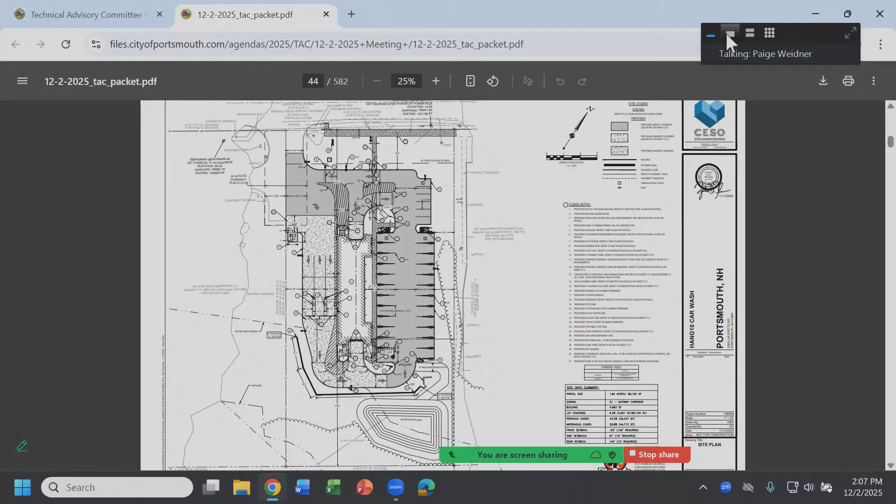As far as the layout of the site in proximity to the 100-foot wetland setback, between the set shown on screen now and a set I sent Peter this morning, we made minor updates where we shifted the site to the east to remove the building out of the 100-foot wetland setback, based on comments provided at the BOA meeting. That's probably more pertinent for the Conservation Commission, but I wanted to mention the change had been made. We're going in front of the Conservation Commission next week on the 10th. Are there any questions about the site before I get into the staff comments and how we're responding?

So if you're moving the building, is the whole site moved? The whole site has moved, yes. The layout and everything you see here remains unchanged. We're just going to provide more vegetated area on the left side than the right side, just to get the building out of that 100-foot wetland setback.

So the 100-foot wetland setback is in the back of the lot—yes, that dashed line right there. Did you guys look at all at moving it closer to Lafayette? I can discuss that as part of addressing the comments.

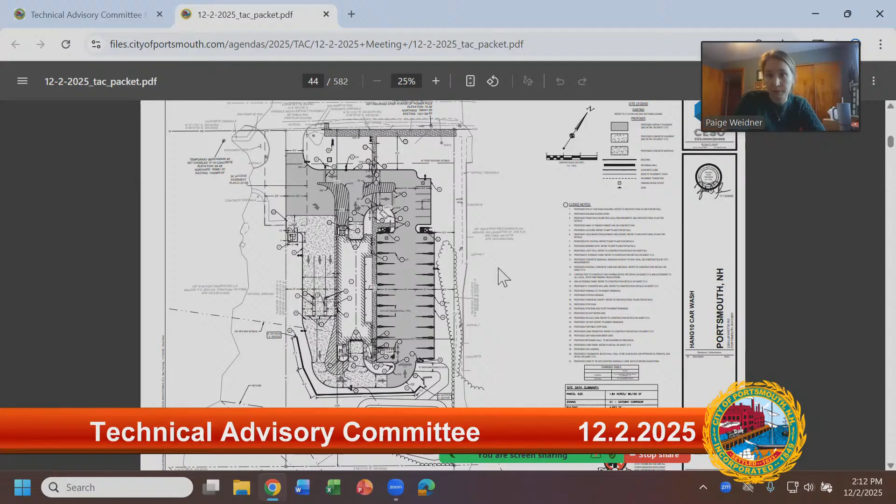Any other questions or comments before I move to the next staff comment? Okay, so the next one was asking the purpose of the 40-foot front setback line. That will be fixed based on the Gateway District and the results of the variance, so we'll remove that setback line. As to fixing the site data summary table to reflect the current required setbacks and noting the granted variances on the site plan, we will have no problem doing both of those items.

Comment number 5 was to provide a green building statement. We will be able to do that, but just to talk through it with this group, the car wash building, a typical building, does provide quite a few environmental benefits, or components, I should say.

One of those being the reclaimed tanks that Jason mentioned as he introduced the site, which cycle through all of the soapy water used in the car wash through three underground tanks, each 2,000 gallons. We reclaim about 60% of our water so we can reuse it multiple times before it won't suds anymore, and then it goes out into an oil and water separator and then into the sanitary sewer. This allows us to reclaim as much as possible by cleaning our filters, and obviously those tanks get pumped out periodically from larger sediment that builds up. So there are three 2,000-gallon tanks buried.

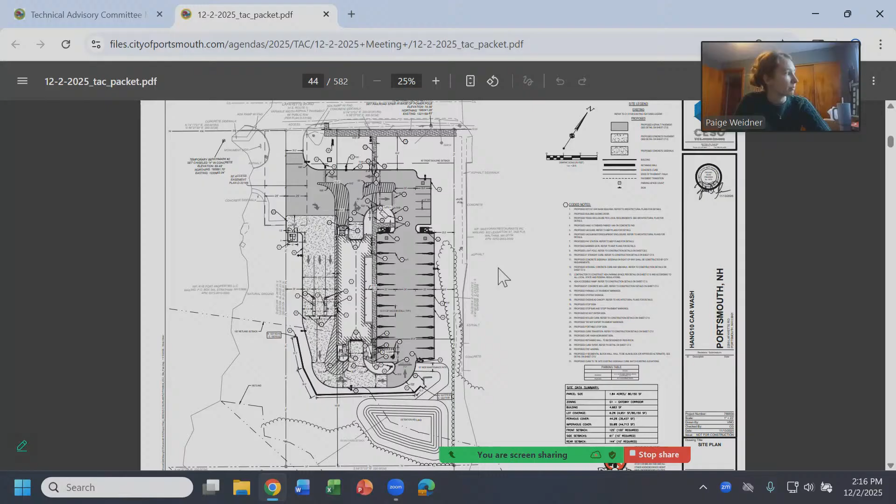Moving on to comment number 6 about the water service: it must enter the main building, then branch off for irrigation, since the city will not allow a separate structure for just a water meter and backflow preventer. So we will go ahead and relocate the water meter inside the building along with the backflow preventer. Do you want the irrigation meter in the building as well? Yes. Okay, perfect, we'll go ahead and make that change.

The next comment was that the trench drain at the entrance to the car wash cannot connect to the drainage system and stormwater detention pond, connect to the sewer, or function as an evaporation drain.

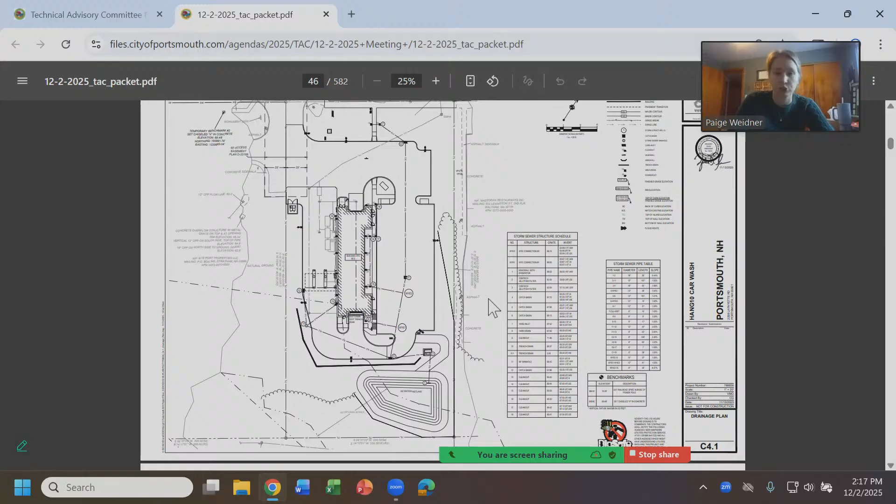I want to be clear that on the south side of the car wash, the trench drain shown is not taking on any soapy water from inside the building. It's only taking storm runoff that ramps down into the building, collecting the last bit of rainwater before it enters. It's purely a storm drain, not taking on any environmentally concerning elements that would be processed through the reclaim system and sent to the sanitary.

Is that something that still needs to be reevaluated, or can that go ahead and connect to the storm system?

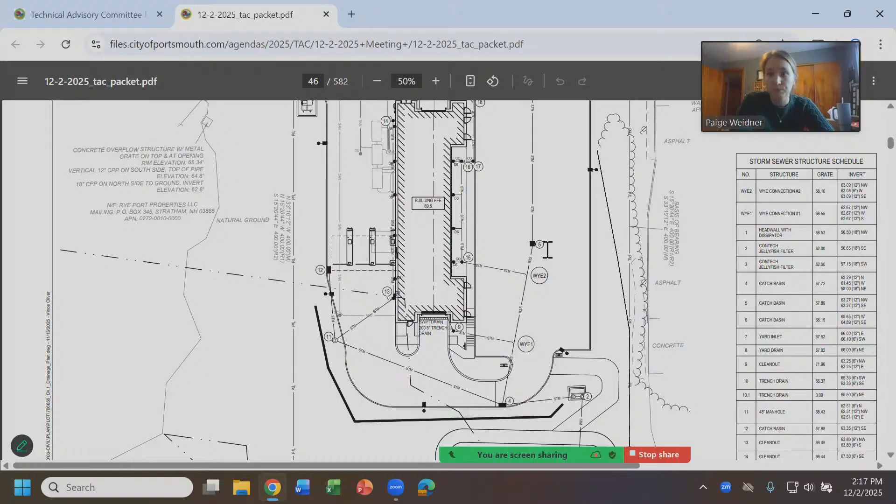The way we typically do our sites is we've got a slight slope for about 20 feet going into our tunnel. Mainly so people pulling in are looking down a little rather than up, helping guide their car in as we point them in the right direction. The other reason is with our belt system, as soon as their front tires get on that belt, they're put in neutral and the belt pulls them through, so that down slope at the entrance helps the car onto the belt easier. We have a similar down grade for about 20 feet exiting the building so the car rolls away from the car wash.

Obviously at the exit, all the rainwater rolls away from the car wash, but at the entrance, rainwater would roll down and come into the car wash, which would go into the system and into the sanitary sewer. So we typically add a drain across the front just to grab storm water so it's not rolling into the car wash.

Just to add on to what Paige said, the grade leading in was not very clear. There's a lot of grades missing on this plan. We can definitely go in and provide some more spot elevations to help clear that up. I think it's just 2%, right, Paige?

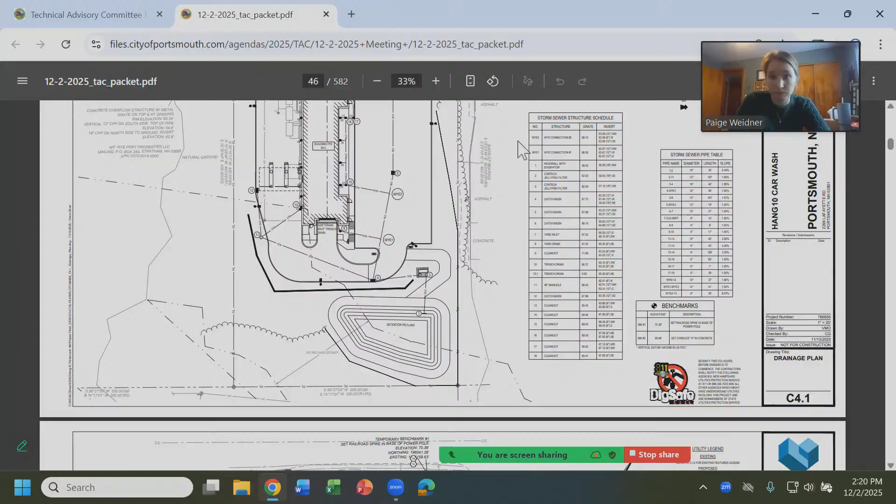Comments from TAC members at this time? I've got a couple, Peter. Go ahead, Eric.

I think you got some comments already from DOT on the curb cut permit application, the driveway. We do, yes. Okay, and just do those.

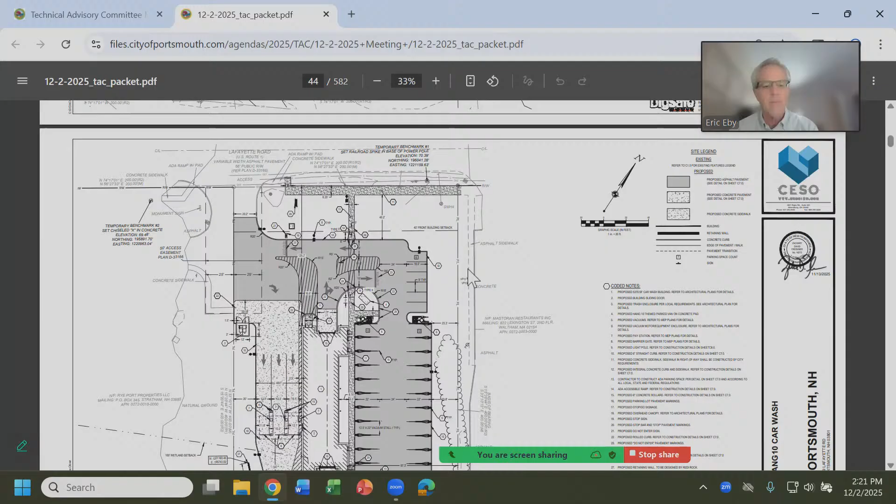The other one I had, up at the top there on the plan north where you have the striping to guide vehicles in and out, is that just striping or will there be any physical curbing or something to guide them? 'Cause I'm thinking it would be a free for all if you don't physically guide them. Yes, so there is a stop sign, a removable stop sign, coded note 24, in the kind of island of striping, if you can see. That is there to help direct traffic and slow people down to evaluate where they need to go.

But it's removable so that larger fire trucks, for instance, could move it out of the way easily to navigate the site. We have other sites where the striping and the low speed that customers exit the car wash at provides ample time to make a decision and follow the direction, so we haven't had issues at other sites. This has been enough.

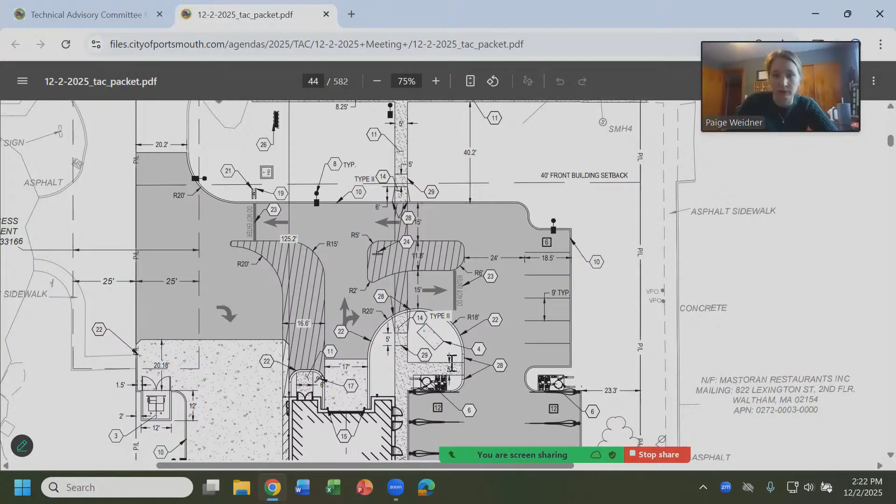I don't think they'll come up and follow the paint, especially if it gets worn off or covered over. I didn't know if there's some type of curbing you can use that you can put in there, but is that gonna be a problem? It would need to be a temporary or removable measure, just for the fire truck accessibility. But we could definitely work through with you what would be satisfactory. We haven't had a problem in the past.

In coded note 17, there is another sign. Yeah, it's a stop-go signage at 17 there. I'm not concerned about customers navigating with the signage and striping provided, but if that's something that's of the city's concern, we can definitely add.

I would say too, about 99% of our customers go into the vacuums. We want to give them the option for the very, very few that don't, but typically they're going to make a right and go into the vacuums.

Especially at night or something, it would just help to have something on the ground as a positive. You can do temporary curbing or reflector bits or something like that just to help guide them. I think it would be an improvement, something that wouldn't impede the fire trucks.

Yeah, we could look into that. Maybe breakaway little reflectors - is that what he was mentioning? Something that could break away, that could be run over, flex posts or something possibly. Something that would not be an impediment to emergency vehicles.

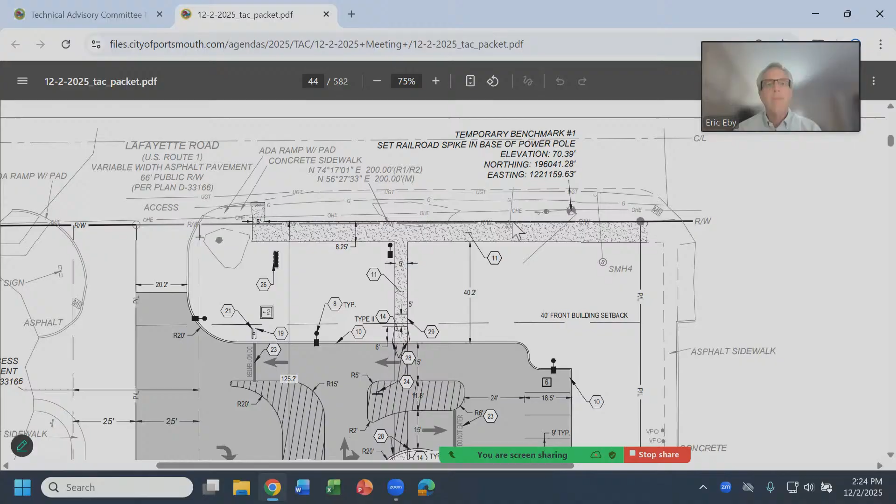I do want to note that the car wash is only open typically from 8 to 8. But it can get dark by then, especially in November.

What was the other one? Oh, the letters on the pavement where the 'do not enter' and stop markings are - I think they're shown in your specs as being 2 feet tall, but they really need to be at least 6 feet tall for drivers to be able to see and read them.

Same thing with the arrows shown on the plan - they look correct, but when you get into the details they're only 2 feet. We can make them 5 feet, larger. That's fine. So if they can be more MUTCD compliant, they would be a lot more visible to the drivers on site to see where to go. Yep, we'd be happy to make that change.

That's all I've got. How about the multi-use trail? Providing an easement - oh, that's what that is.

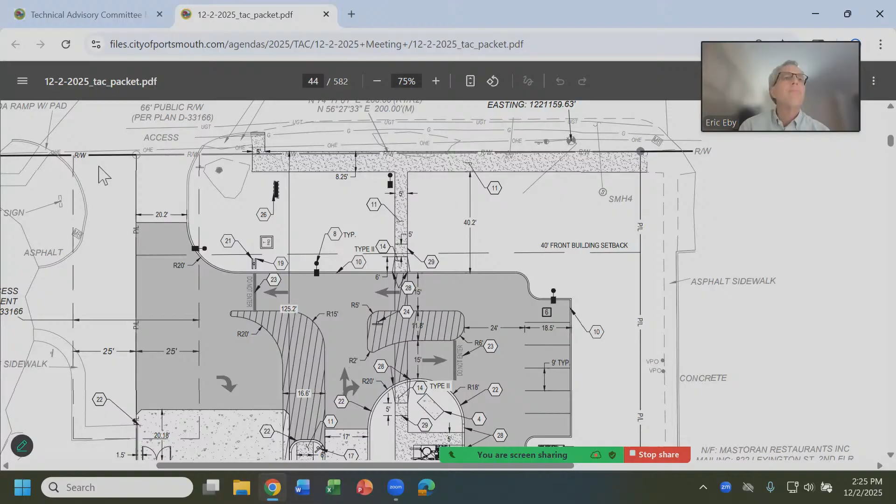What was it, 8 and 12? It would be expanded all the way to the driveway, and then the Taco Bell side needs to be expanded to the other side of the driveway - it needs to be continuous. It should be 10 feet wide if possible, because when it's shared with bikes and peds, 10 feet is the preferred width. That shouldn't be a problem.

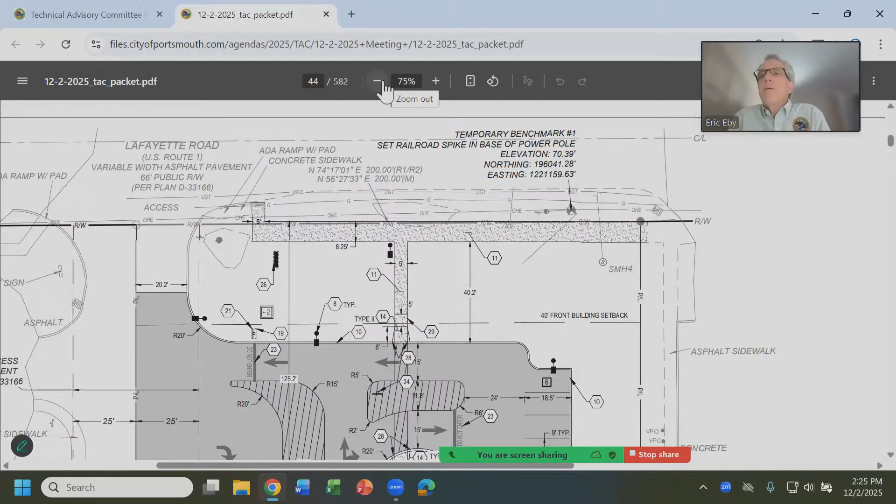Do we already have an easement out there? I don't know, Dave, is there an easement - the 12-foot easement that's usually provided by all these projects? I don't remember if we have one on this site or not. My instinct is we do, it was just never built, but now we're building it so we need to confirm that the easement's in place. So there is a 12-foot future road widening easement. Yep, that's the one. Okay, so nothing needs to be changed. I'll just show the easement on the proposed plans.

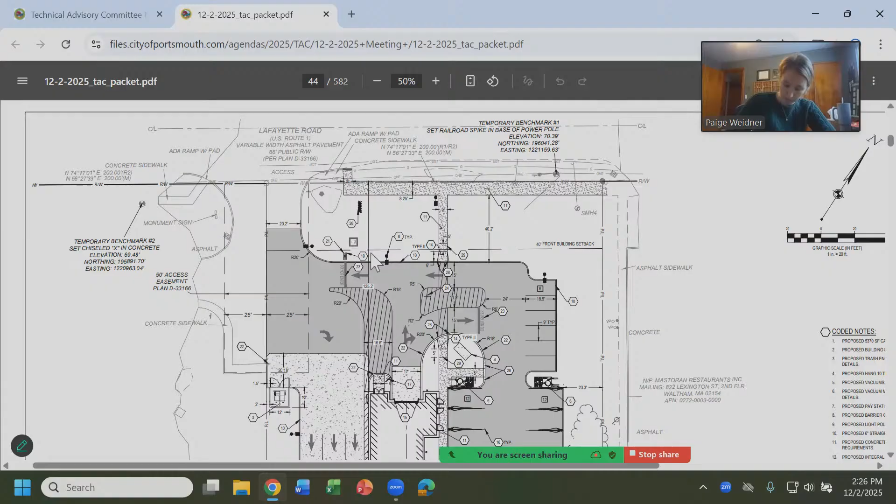The other thing I was thinking that's probably gonna be necessary on the site is a fence with a screen, so that with trash cans and stuff by the vacuums, we don't want that blowing into the wetland. We're gonna bring a fence around the whole vacuum area so that it contains the trash and doesn't allow it to blow - that's a very windy site.

If you can see the retaining wall on the south side of the site, would a fence along that be adequate? Can you point it out to me? His cursor is following it right now - yeah, just keep going up and up, all the way to Lafayette Road, just past the vacuums, so that the wind, which is usually coming up from the south, is blowing toward plan right.

Okay, for the multi-use path, if we provide a ramp to go into the driveway, are we going to be required to? Is it fine if we stop it at that point? As we've provided access, you need it from property line to property line. To cross the driveway, there needs to be ADA ramps on both sides. So that's the ADA ramp right now, on the Taco Bell side it's kind of diagonal.

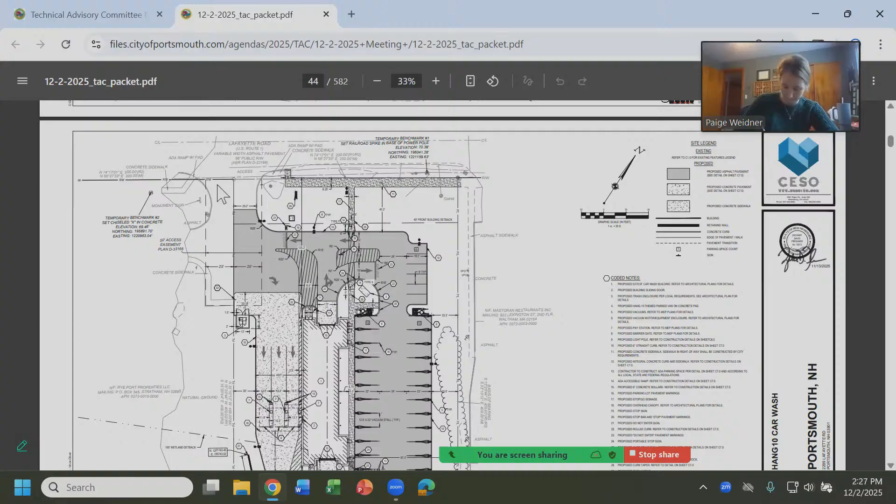It was diagonal because there was no walkway across the driveway to go to. So now, do we decide to keep going straight? Okay, so you want the ramp straightened out, yes. I just wanted to make sure I was understanding. Truncated domes on both sides, got it, with the stop bar in the correct spot, okay, the blocking. Yep, sure.

Just to clarify, because we're not leasing that property, that's in the state's right of way and in the easement controlled by the state of New Hampshire, it'll be allowed. We just need to get okay from the landlord and Taco Bell while we do work in their easement. You have to coordinate with them, but okay.

Pat, go ahead. So the truck turning template is a concern. Right now you have us doing a 3-point turn. Sorry, what are you looking for? The truck turning template exhibit, right now we're doing a 3-point turn to get out, and we're smashing through a few parked cars there.

Okay, we can, ideally we would go around the building. And so the furthest gate from the building would have a Knox key switch. Okay, so the problem we have with that is our lanes are typically 9.5, and we have a truss system with a 7'2" stop height. That's the highest car that could go into our wash. We don't want to go inside the building.

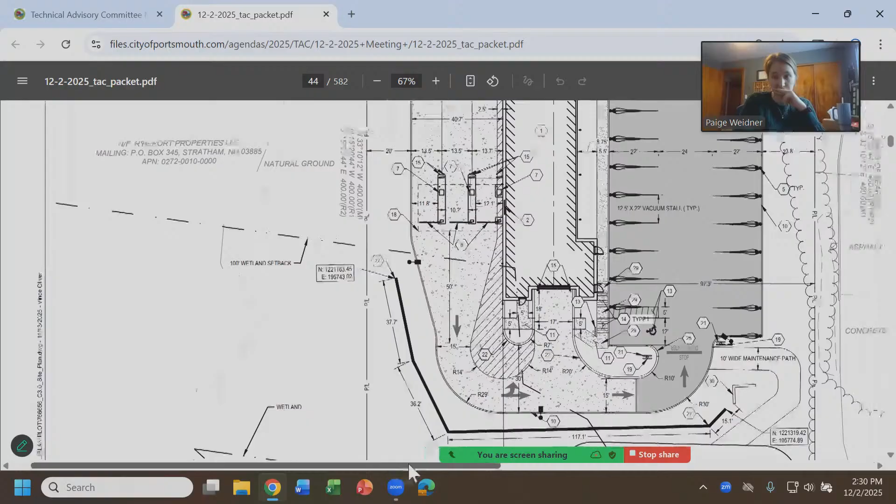I mean, they'd have to back out if they hit it, but at least that would allow for fire truck access. Well, they've already paid at that point, though. They'd have to get a refund. Yeah, wow. I mean, that's something you guys can work out, how you deal with that, but we just need to be able to get around the building. There's not enough room to do a turnaround.

Where you're showing, 11-8 will be tight, but we can get through that. And you can just do that outside lane, the Knox key switch, and then if there's a height test type of thing, a barrier, it would have to be at 9. I don't know where we would put the height. I mean, I can't put it past the gates either.

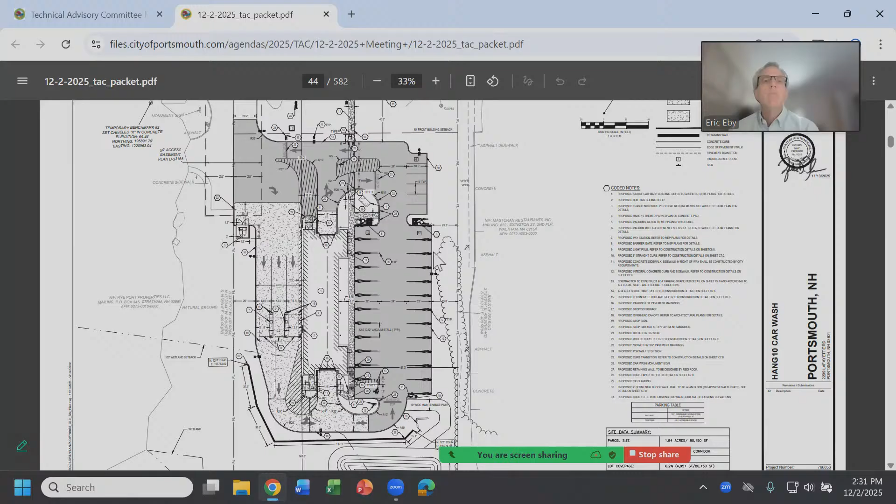Because you would still be driving through it. Right? If the height thing is there so you don't hit the building when you go in, then as long as you have it before they go in the building, it would accomplish that, right? You mean like right before they enter the building? It would have to be like where the 22 or the 11 is, somewhere in here it looks like. Yeah, to the front of them, right?

Unless you can come up with another way to get us access around the building. How tall is your truck?

Is your intention to bring this to the Conservation Commission first, to see if there's going to be modifications before we approve it? They're going to the Conservation Commission next week. They're heavily in the buffer zone, so I suspect they're going to have issues, they're going to ask for modifications. So I'd rather take a last look at this after. I would think it'd make sense to do that.

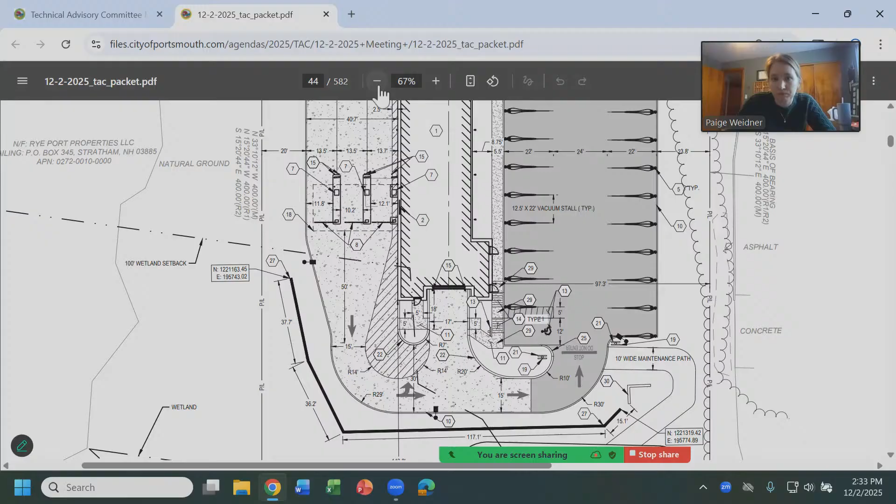Would we be able to get a conditional approval, with the condition that the site did not change based on next week's results? And if next week's results are drastic enough to make significant site changes, then we come back? Is that a possibility? I suspect you're gonna be coming back anyway to address the fire department's concerns, the stormwater, and the grades.

And the water meter. I'm also trying to think about our LPR cameras and how high those are mounted in that pay lane for our members. I think the maximum height they can be mounted is 9 feet. Yeah, we need to get around the building, so however you put out to do it. Jason, we could explore potentially a bypass lane, see if we can't squeeze something in there, but I'm not quite sure how that will work with the pay lanes.

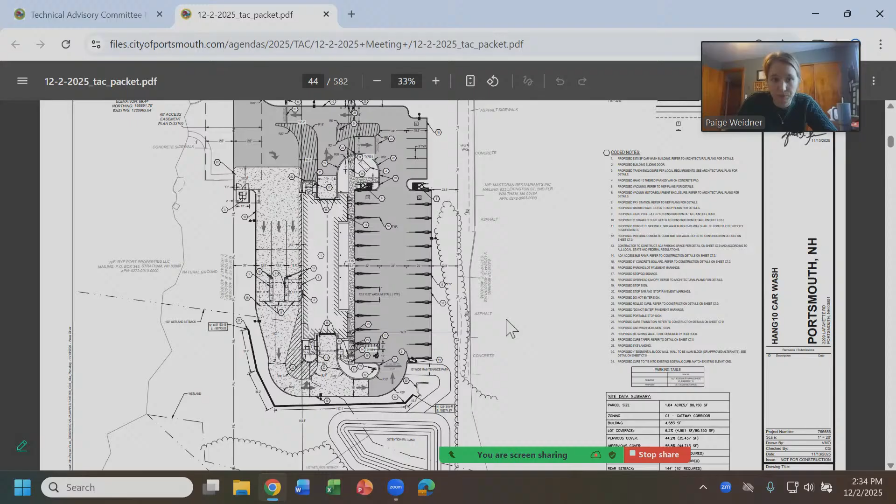I know it's not for this, but did you see the comment that Kate sent about the New Hampshire wetland scientist? I did, and I've been working with Kate directly on getting her that information. Okay, great, thank you for bringing it up though. Yep, just wanted to make sure you're aware. Yep.

All right, is there anyone here from the public like to comment on this? Or anyone on Zoom? All right, if not, we'll close the public comment portion and open up for further discussion, if there is any.

I'll just clarify a little bit on fire department access, just to save having to come back multiple times. We don't do removable bollards or anything that we have to get out and move. We're okay with mountable curbs, that sort of thing. You are, okay.

I would also add the landscape plan looks good, but there's nothing shown other than lawn for the pond. Is that your intention, or usually we'd be able to landscape that a little bit? We can provide additional landscaping around the pond. Around it, it looks like you just have lawn and nothing on the banks. I guess, is it gonna be lawn the entire thing? If that's the case- Yes, that was our intention. Just be clear that that goes the whole way. Okay, it appears like it's just the top strip. Okay, and then you have a maintenance schedule for mowing it or however you're gonna maintain that. Sure, sure.

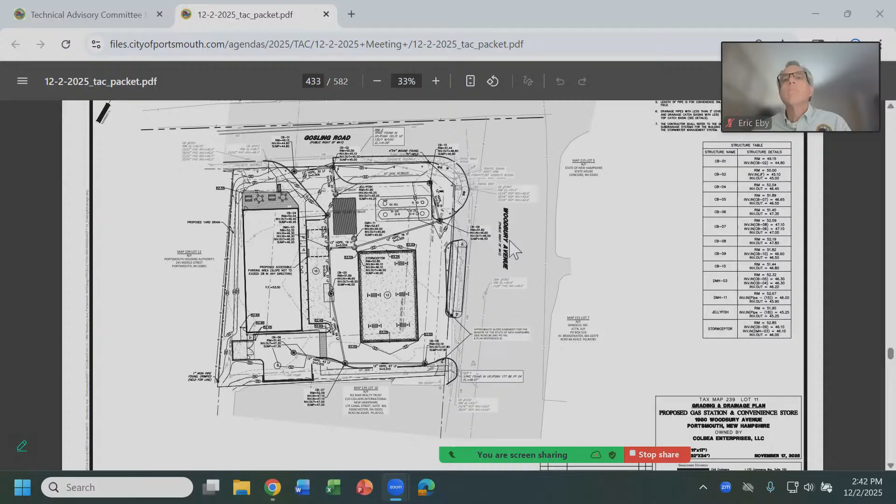Nice. Can you adjust your existing features plan and move your note? I didn't see a note to abandon the existing sewer lateral. Maybe it's on the site prep plan, not the existing conditions plan. Do you want something specifically noted on existing conditions? Hold on, I'm getting there.

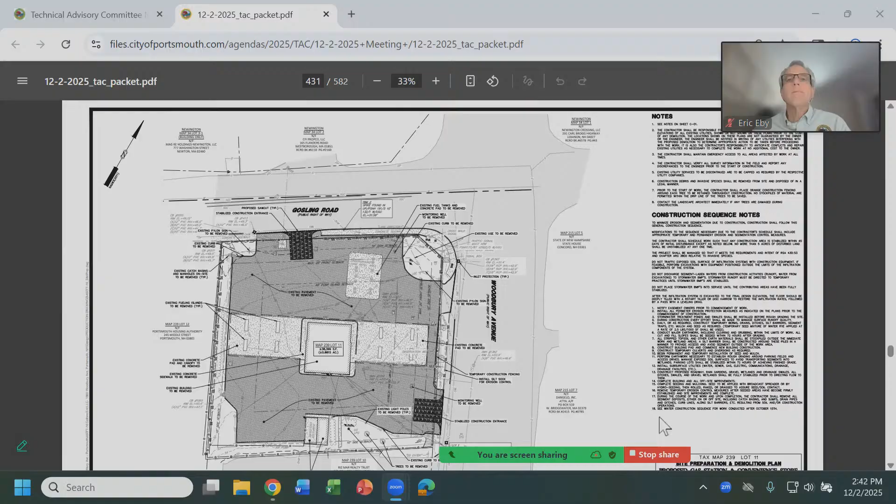And then some of the notes that you had regarding that water service are no longer in the right spot because the water service has now been moved. Okay, so we have to take a look at your plan and just update it so it's correct, please.

If that hydrant's gone, then remove it off the plan as well. Where did the hydrant just get moved to? I'm not sure, I just got the comment yesterday afternoon, so we'll take a look. I think it's there, but I haven't, I'm sure it's there somewhere. Maybe it got shifted further south.

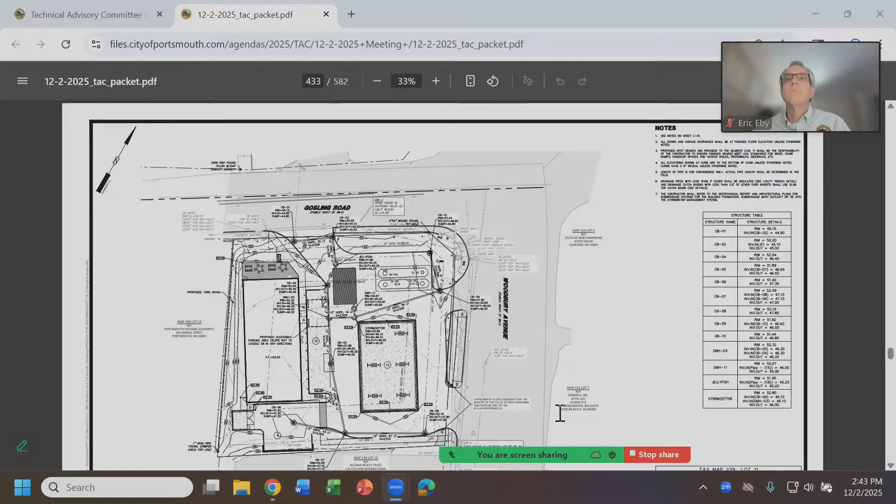We actually have, yeah, the hydrant over by... Peter, I'm not sure if the comment came from you or from Stephanie, if we should coordinate that. If it is in fact still there, we're obviously not going to remove it from the plan. I think it's, I'm pretty sure it's still there.

You're showing the 8-foot sidewalks all the way around the site? That was one question we wanted to discuss. Right now, the existing sidewalk on the east side of the plan along Woodbury has 8-foot sidewalks up until the northeast corner, and then it's 5 feet from there, wrapping all the way around.

8 feet can be provided there. It's all in the city right of way, but there are a lot of control boxes and signal equipment boxes in that location, so I don't know how you wanted to address that.

We could provide an easement to allow an 8-foot sidewalk for the portions along Gosling Road at the north end of the page. But would you ever go from 5 to 8 back to 5, or keep it at 5? We would do 8 and wrap the sidewalks around the appropriate spots.

As long as you're not in the mast arm, which it looks like you might literally go around. The traffic signal box you would go around, and the rest of the boxes are flush with the ground, so it shouldn't be an issue.

And like I mentioned, if you zoom in on the corner, that makes the accessible route easier because you're now incorporating the push buttons into the sidewalk. That's fine, I just wanted to ask the question for clarification, so we'll show 8 feet?

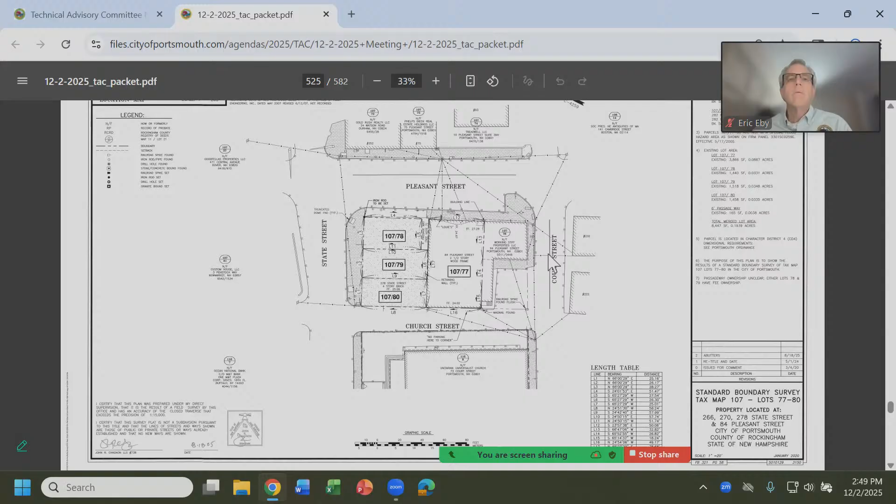I don't know how much more you want me to present at this juncture, but you have a license plan shown there in your package. There's some cornices that were requested in the HDC process. They're up in the air above the sidewalk by a few stories, but they'll be in the city space, so there'll be a licensing process gone through with the council for that improvement in the city's right-of-way.

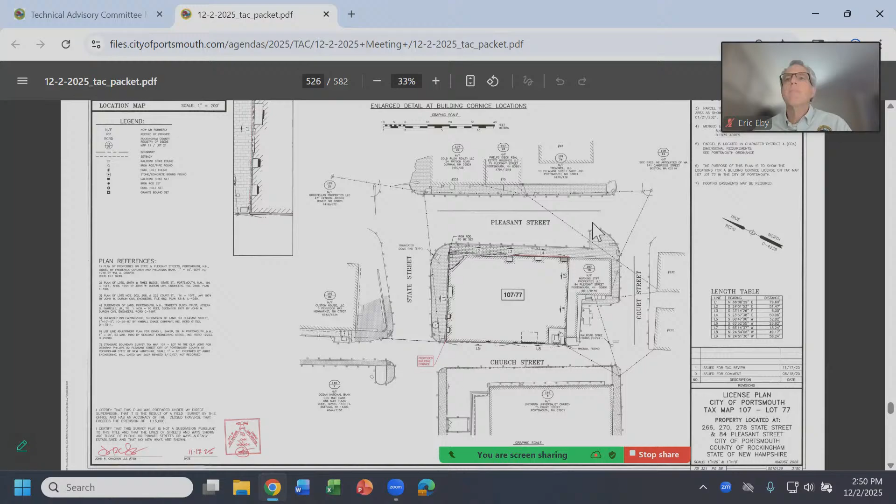The next sheet is a recent orthophoto plan showing the site as it exists with the outline of the proposed building in green. There's an existing conditions plan, a demolition plan showing the removal of a portion of that building at 84 Pleasant, and then the site plan. The site plan shows the new building.

The proposal is to have access to parking at first floor level. The parking is accessed from Church Street through a garage door. There's, in your package, some turning movements that have been submitted. There's a parking system that will allow the 2 spaces shown here to contain 8 vehicles each - 8 on the left, 8 on the right, plus 1 surface ADA spot, yielding 17 parking spaces for the site development. The project has 17 units, so there'll be 1 space per unit.

Based on the changes to parking requirements, 1 space per dwelling unit is the maximum with the 4-space DOD reduction. 13 spaces are required, 17 are provided, so we meet the ordinance requirements there.

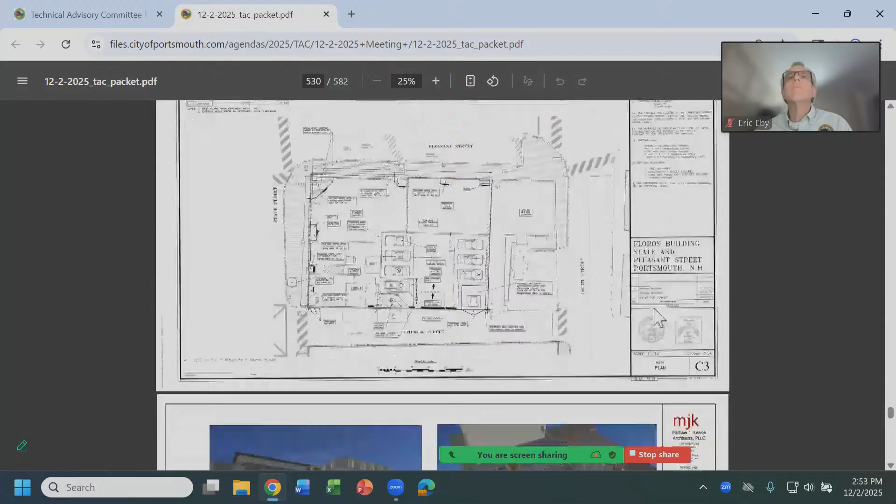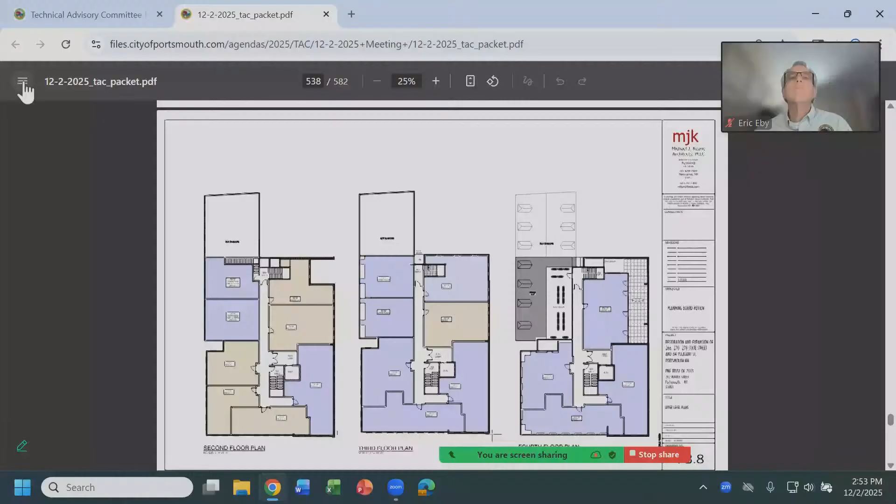We have building renderings in the set, floor plans, and a utility plan showing the proposed connections. We also have off-site electrical plans and a lighting plan. The roof drainage will be connected to city infrastructure, which is shown on the roof drainage plan, and then we have the requisite detail pages. We received comments yesterday, and we've provided a response today.

If there are no other questions in general, I'll go through those and provide our responses. Sounds good. Okay, so the first comment is on Church Street.

The doors for the transformer cannot open across city property, so the site plan shows a swinging gate, and you should be licensed for that. We would add that to the licenses you're already going for. Okay, so it's okay to have the swing gate, and we just need a license. Yeah.

The second comment is to provide an easement plan showing the easement. They can get it, yeah. If there's another way to do it without having to get a license, it'd be preferred, but this is part of a negotiated thing that the Public Works Department worked on with Eversource ad nauseum, really - it's part of the electrical backbone for this part of the city. Understood - the department's going to support it, but the department doesn't give the license, that's city council. Right, exactly, that's the only point I'm making.

In the response, we did say we're showing a gate, and we understand it would probably want to be shielded, both for looks, for HDC, and also to keep people out of there. So the architect will be working on some various options. Maybe it can be something that doesn't swing, but either way, we'll take care of that. Okay.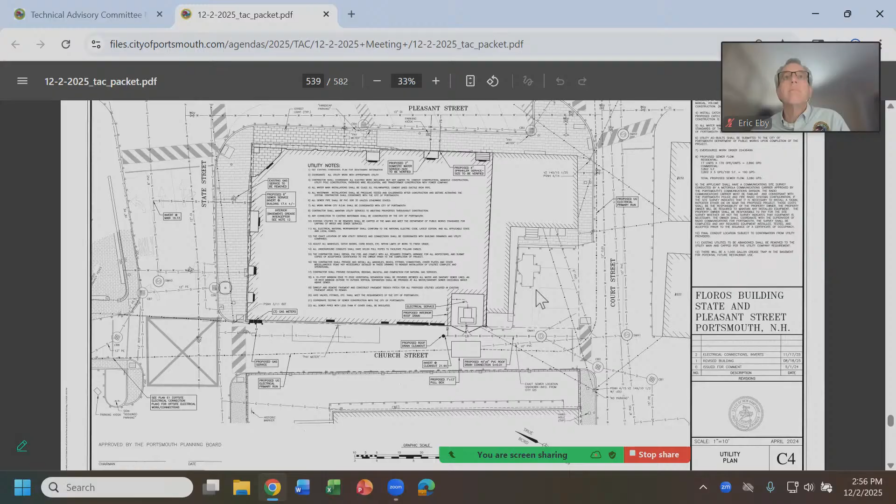There is a sewer shown on your GIS, but it's just a stub that we put in when we were doing Court Street. We're not quite sure where the Stone Church's sewer lateral comes out of the building. We need to chase that down to find out, so that we make sure we don't do something foolish there.

And we'll add to that note, we did put a note on there about the easement.

If a restaurant is proposed, please show grease trap location on the plans. There is a grease trap shown interior, a basement grease trap. How do you plan to get that pumped out, is there a hatch or something? Most likely there would be a portal you could stick the hose in, like at Jimmy's Jazz Club. There's a couple of other locations like that too.

It was 1,000 gallons, so that's a good size.

Comment 4 is to include notes on the utilities plan to cut and cap existing water and sewer services. We added note 14 on utility plan C4. Next, delete note 9 on the utility plan, so we provided a strike-through for that.

Cut in a Y for the sewer connection, and include a clean out in the sidewalk for testing. That's on the State Street side, so we showed those items. Hopefully that's appropriate, how we laid that out for you.

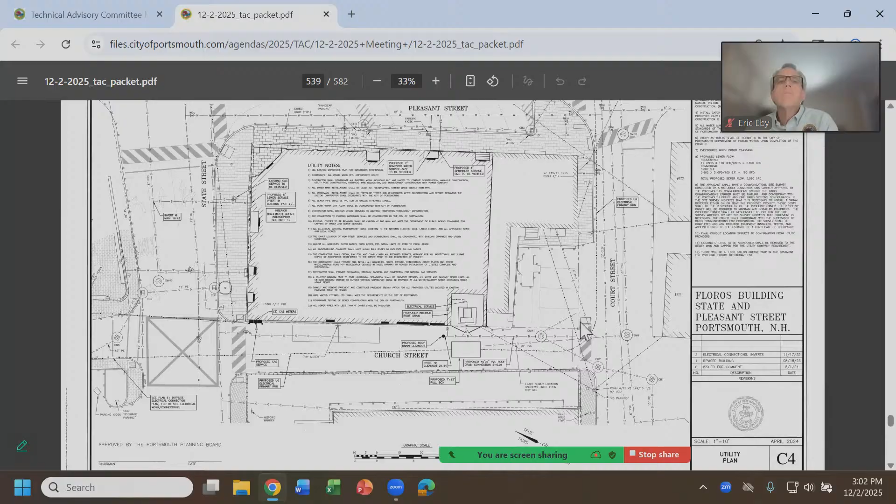The rest of it looks okay, John. Are you using 6-inch granite curb or replacing the existing? Typically we have a construction note above it that says existing granite curb disturbed by construction shall be reused. Are you adding any light poles, or resetting the ones that are there that will have to come down?

Nothing citywide — we're not touching any kiosk locations, striping, or poles. We are adding site lighting that will have some spill, which I think is a benefit. Why don't we just add a note saying that if any street lighting needs to be moved for construction, it gets replaced or reconstructed by the contractor as appropriate, because you're going to need SOE here, and that's going to wipe out the sidewalk.

So the street lighting shall be preserved during construction, or replaced and reconstructed as needed, and approved by the Public Works Department. And all your grades on the sidewalk are showing less than 1/4 inch per foot? Yes, I went with 1%, so I took the — I might have gone 1.5, but I didn't go more than 1.5, that's for sure. Okay, good.

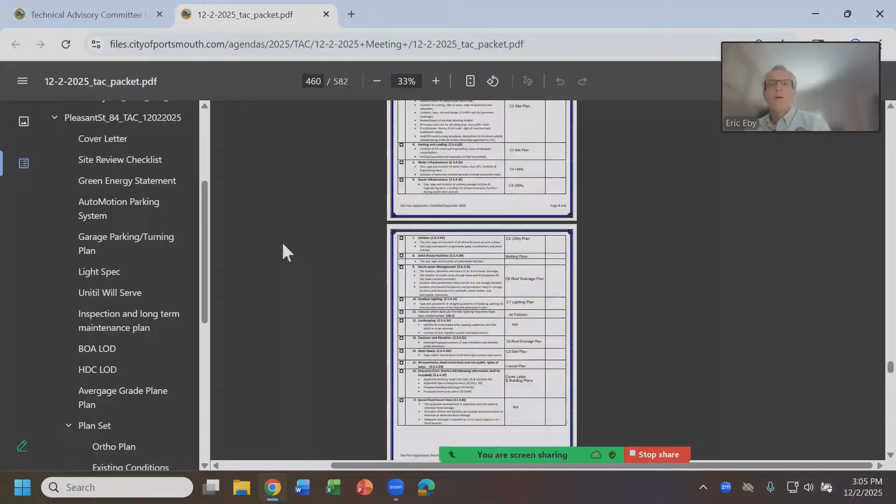Eric, do you have any comments? My comments are mostly on the parking, on how the automatic parking works. The driver drives the car into the empty stall, and there's room to get out and maneuver, walk alongside there? Correct, yes. It just looks really tight. Looks like as long as there aren't any cars over 17 feet long, it'll work. But I'm wondering about when the driver has to drive into the empty stall, then get out of the car, open the door, and get out.

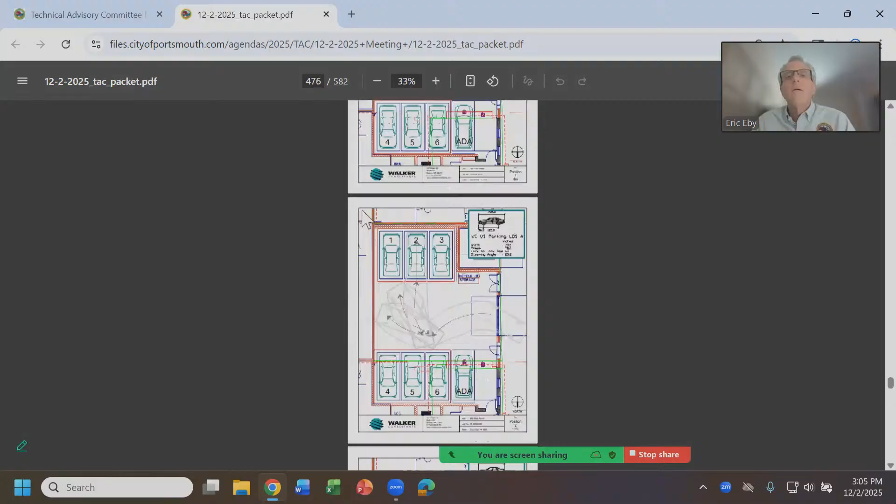If you go to the other view — keep going — it shows the system. It's kind of like a parking spot: there's a stripe, and there's a little extra space because the car isn't right tight to the stripe. It doesn't have a fence barrier, so it's just like parking in a parking lot in a way, as long as the door can clear. Is there a little curb on the side? Yes, the door will swing over that beam that's part of the pallet. We're actually looking at a system with an even lower pallet beam, but haven't selected a final manufacturer yet — all of them allow the door to swing over into the adjacent space.

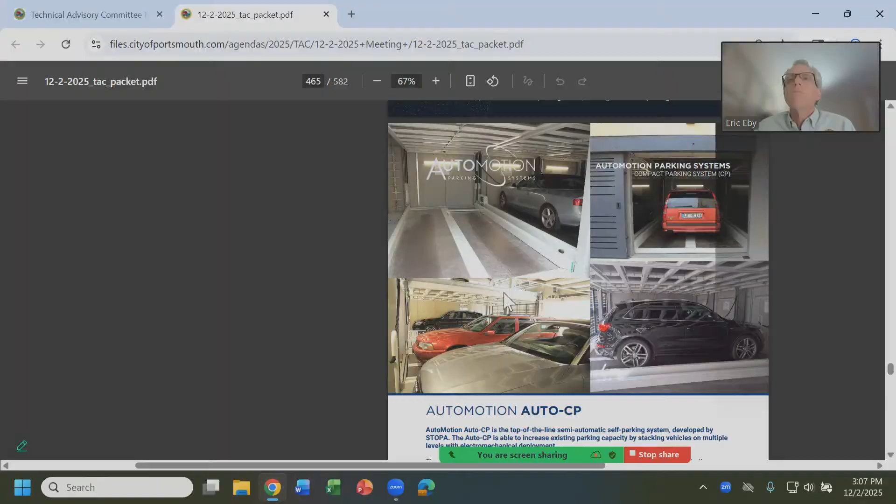And there's no way a person can fall in between the two stalls or anything? Correct. Can they pull into any of those, or do they get assigned? So it's not like one of the systems described where you always pull into the same space and it just moves — like the middle one is always empty. Right, but that's not this, right?

You'd pull into any one of the three that are at grade level, and then the cars would shuffle around. The pallets are assigned, so your pallet comes down to whatever empty spot is at the drive-in grade, and then you drive in — but that may end up at any one of those three positions at grade level. We had originally hoped that each could move up and down.

Does each spot hold 2 cars or 3 cars? Three — except there's one spot that's always open. So in a 9-pallet array, there are 8 parking spaces, because there's one spot that's always open that allows you to shuffle. So the cars can move side to side as well as up and down.

No, originally we had hoped perhaps that we could always make the center stall the one that you drove into, just because it made the turning movements easier. But the manufacturers are saying we need to make all 3 of those at-grade spaces available for the car to come in order to be able to shuffle them around. Otherwise, we'd need 2 open spaces.

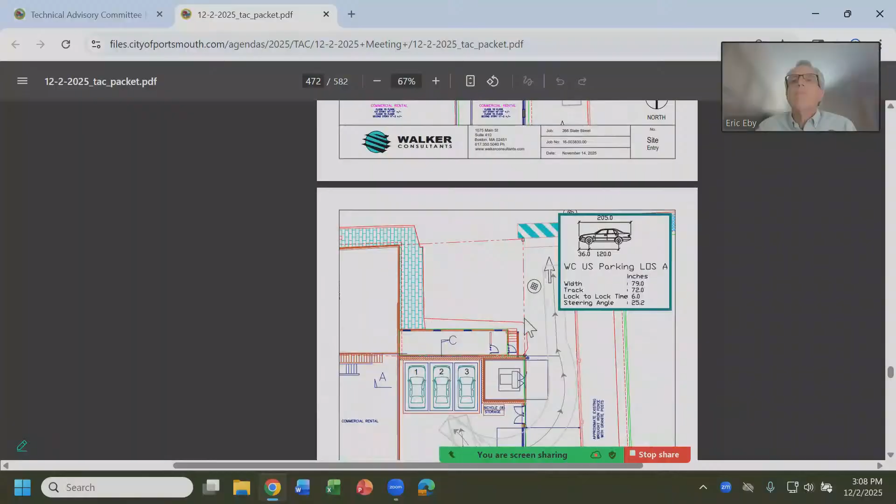Do you think these turning templates in there are realistic? The consultant said that she used LOS A templates, which are most conservative to allow for some margin of error. Her explanation was that that would be adequate for somebody who's not familiar with the space, and as you get more familiar with the space, they would typically start to tighten those down, but to be conservative, she used the LOS A turning templates.

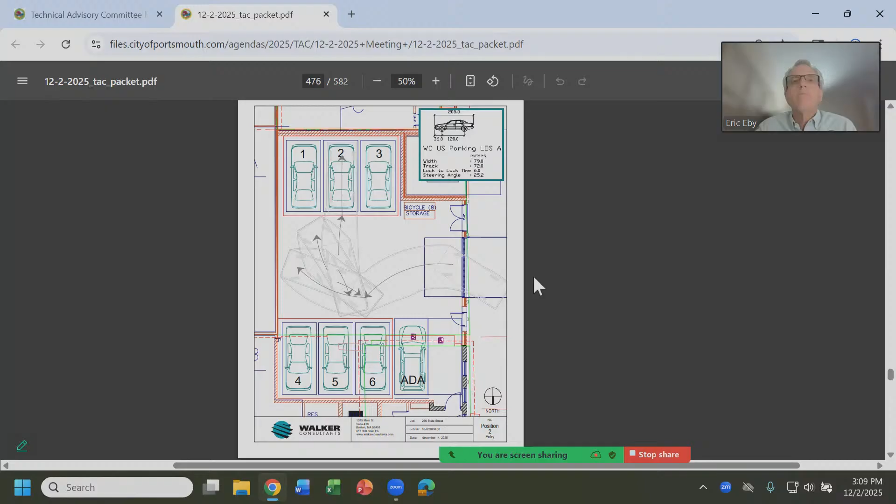There's some looks like 4-point turns in there. There are some, yep. And the 2 spaces that are closest to the interior wall with the Louis building did not work well for what they call their design, the AASHTO passenger design vehicle. So they looked at them both with the AASHTO vehicle and what Walker Consultants uses, their 85th percentile vehicle, which would represent 85% of the cars that are on the road in America today. She said the 85th percentile car worked well, but the AASHTO P vehicle was a little bit tight trying to get into those 2 spaces.

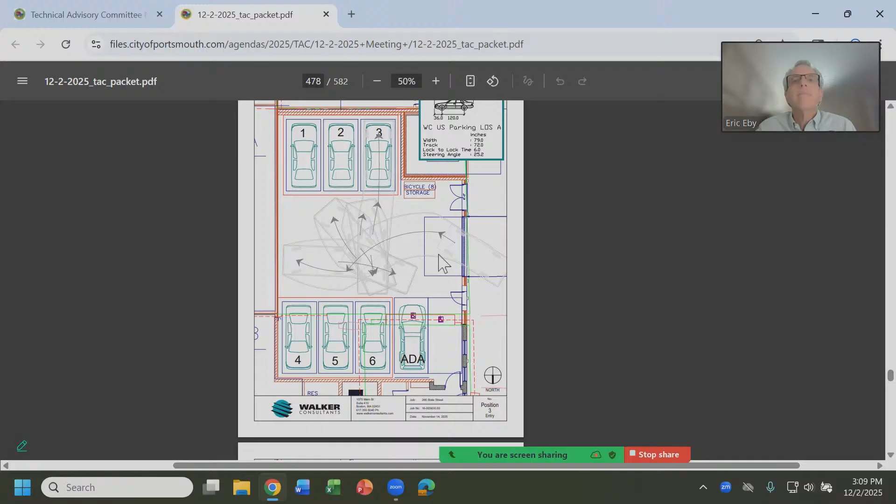Matter of fact, they had done a study that said you could back into those spaces fine, but obviously that doesn't work with the city ordinance that you can't back in off of Church Street. So we're showing those - what would be 6 spaces - would be for an 85th percentile vehicle. It seems unlikely to me that people won't be backing out onto Church Street as opposed to doing the 4-point turn.

And the guest parking is part of this too? The calculation is such that the DOD has a 4-space reduction - 4 guest spaces are required, so I think the guests will be parking in the spaces that are available in the street network, essentially. That's what that means.

You need to have a key fob or something to operate this, right? There's actually, I believe, a control pad that you'd use, a computer interface pad. We had talked about the possibility of being able to do it with your phone or a key fob or something like that, and the explanation is you probably don't want to do that because you don't want that system moving if there's not somebody in there to have their eyes on the system to make sure everybody's safe. So the recommendation is that at least as you're retrieving your car, there would be a computer interface monitor.

Are there safeties built in so that if there's somebody in the actual parking space it can't move? I've seen some videos where some companies have that detection system - I'll confirm that. Similar to a garage door or whatever, something that would detect that there's something underneath it and not move. Yeah, more of the whole area, make sure that - you want to make sure someone's gotten out of their car, out of the space, before the next person tries to maneuver things around. Otherwise, that person gets caught up inside there.

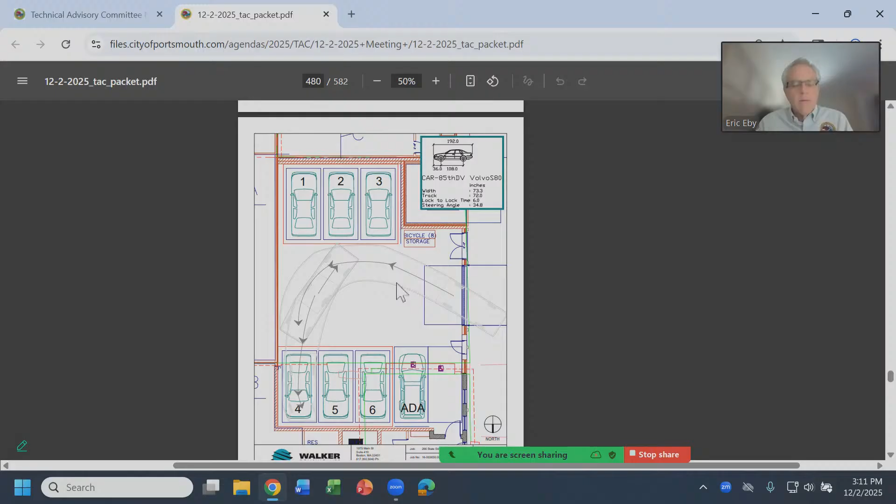It's all very tight, has multi-point turns. If a car comes in and out at the same time, would this require a similar alarm system of somebody coming out to make sure nobody pulls in and crashes into them? At the overhead door itself? Yeah. Yes, okay.

One and four - no, the ones that are outside, yeah, they get restriped. And I haven't really noticed that they're restriped, maybe they made them bigger, but oftentimes vehicles are outside the stripes on those, because they're right up against the building, they have to open the door. It just seems really tight.

I believe they get restriped pretty close to where they were before the street was repaved. Yeah, it's probably looking at where - probably they are the same now, and where they were. They got restriped. Somebody did? Yeah, it's been paved and striped. Yeah, they're straight.

The parking department... I didn't think, previously they weren't metered, but now they are. Oh, that explains it. Yeah. They put up the sign, it's making money.

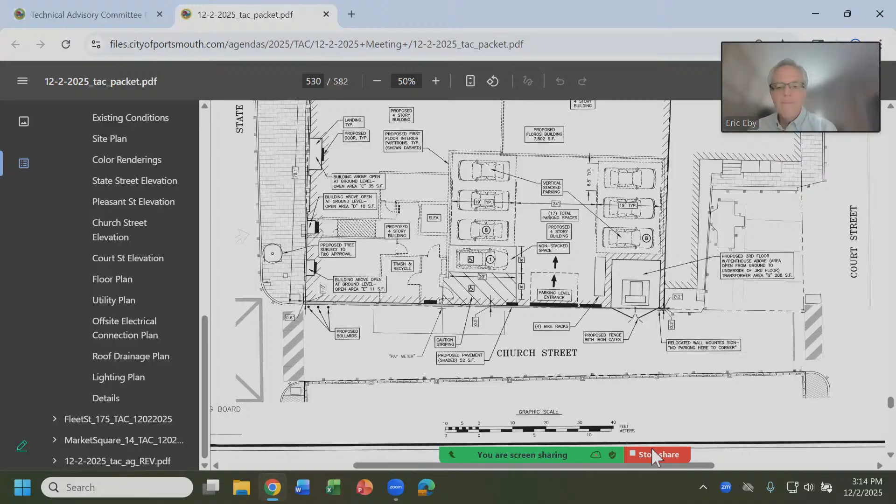Open the public comment. Is there no other comments? Anyone here or on Zoom wishing to make any comments? Go ahead, Barbara. You're on mute.

Hi, this is Barbara Zenny and Matthew Beebe from Working Stiff Properties, 94 Pleasant Street. We're direct abutters. We have questions about the transformer and the transformer location.

I've tried to do some background work to find out about the possible effects of vibration and/or sound that would affect our property, which is immediately adjacent to that wall. We've not been able to get any information from local electrical inspectors or directly from Eversource themselves, because I don't know that it's been decided exactly what size that transformer has to be.

But I think it's important to note that with all of the footprint on this property, that seems to be right up against the abutter, which isn't great for us, given some of the other things that have been permitted on this site that also affect our property. So I'm wondering if there could be a discussion about whether or not that transformer could be moved, or at least get some information to us that would assure us that it's not going to affect any tenants or the use of our property. And we're talking about decibel level, vibrations.

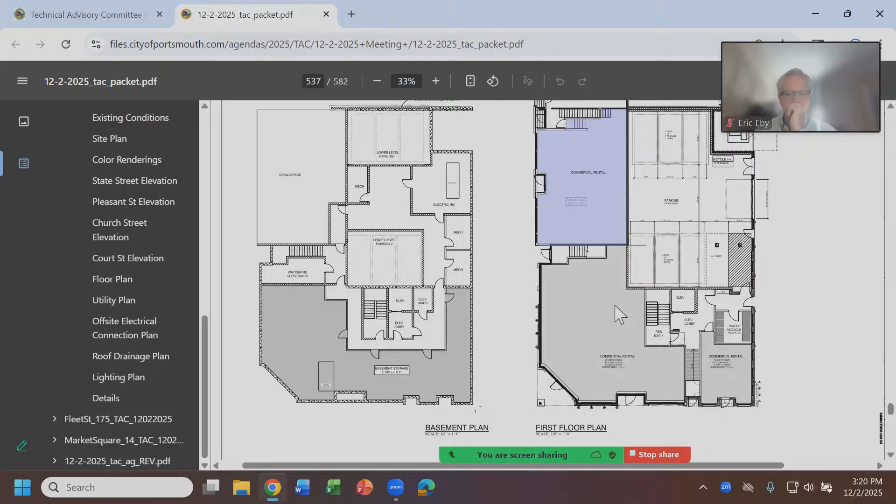How are we feeling? Is there major things you need to see again, or stuff that you can review prior to planning board? We brought up a bunch of comments today, most of which are addressed in this set, but not everything. So I think it's close enough that I'm okay with moving this on. What do you feel? Yeah, we could review the minor changes. What did you want to review still?

Should we get those poles' whole location? That would be a note, cause it'd take a while to work that out. The note about the pull box — the electrical manhole, it's not a pull box, it's a manhole — making sure the sewer isn't going through that, making sure there's notes on there about the electrical system, making sure the sidewalk cross-section note gets fixed. Little things, they're just little things. Yeah, I just want to make sure we capture them, so we know what we're looking for before it goes to planning.

And I guess the second comment would be to address the neighbor's concern about the vibration and noise, making sure there's some kind of coordination and that gets vetted to make sure the building alcove is appropriately designed. Whatever licenses you might need — we're gonna need that would be a condition of approval as part of the planning board, but just so it's clear to the planning board what you're asking for. Yeah, we'll add the licenses. Are we gonna need a SIMA fee as well? Yes, for sure.

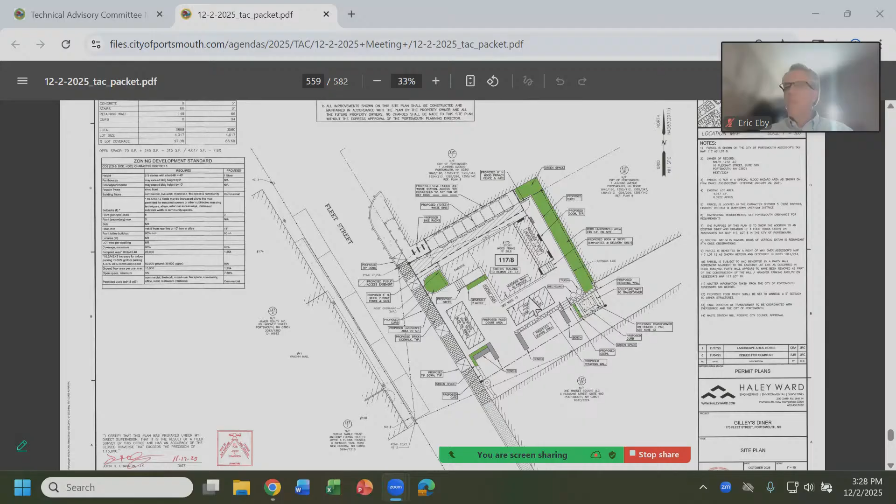Third comment is to provide a green building statement; that's been added to the portal and included herein. Fourth, utility note 9 must be removed — on sheet C202, we've put a strike through that note.

Comment 5: the two kiosks will need to be individually licensed for health department requirements. Understood — we've added note 15 to sheet 201, the site plan, and we would assume that would be a condition of approval. Comment 6: any fencing required by the liquor commission or used to divide the site is required to go to the HDC. We understand that — we've added note 16 to sheet 201. We would ask that be a condition of approval carrying forward.

Bathrooms cannot be connected to the grease trap; show a separate sewer line that does not route through the grease trap. Sheet 202 has been revised to show a separate bathroom sewer connection.

Comment 8: do not install brick sidewalks, since the Fleet Street project is pending and will need to cut through and replace the sidewalk. So we've revised the plans to show bituminous sidewalk on sheet 201, and the detail on sheet 502 has been revised.

In the handout material I sent, one of the comments from the workshop had to do with the food kiosks being permanent structures and setbacks there too. They won't have tires — they'll be permanently in one place, labeled here on the next sheet in the plan.

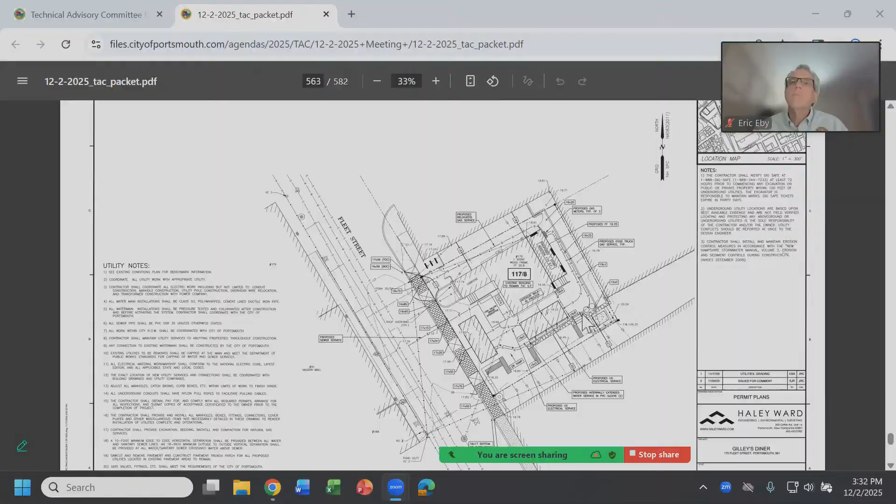The existing water service for Gilley's is being used for the other two structures as well. That's correct. And where are you grabbing power, Mark?

Where are you grabbing power for all this? Well, the existing power is adequate for what we're doing. As you are aware, the whole area is eventually going to have transformers and be upgraded, but currently, right now, those two little kiosks, our power's fine. We were showing connecting from the building, so.

So you're using the existing electrical service off of Gilley's. That is correct. Yeah, that's correct.

And are you still showing transformers in the back corner like you were last time, Dave? That's a placeholder to represent that we're cooperating with the city and Eversource and will allow a transformer on our property. That's that spot, Plan East, right there? Yep, that's correct. That's the intent. Is that enough room for two transformers there?

If it's not, we can make it. We have not seen any further from Eversource since the meeting we had a year ago. But we own all the land, I'm sure we'll hear from them as soon as you start moving. Yeah, exactly, we own all the land on both sides, so we obviously have flexibility to allow that to move. Do you know if they want to put two there, or can you reach out to them? We will likely need different voltages, that's the reason.

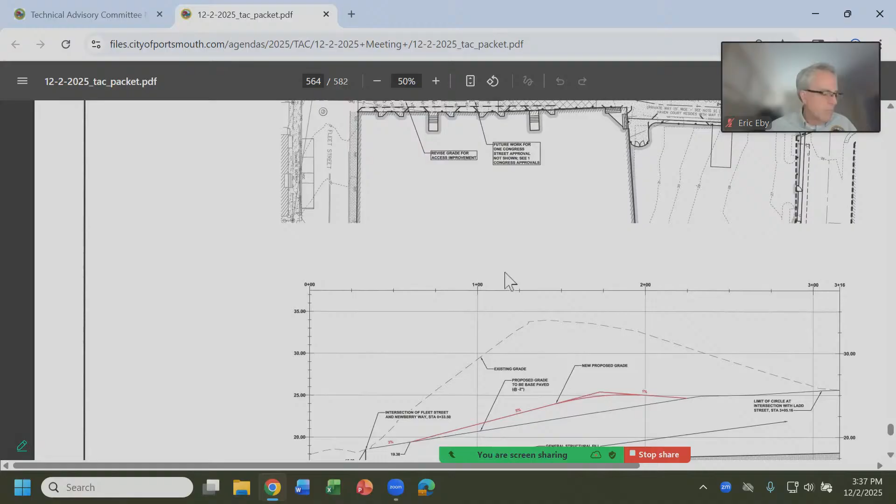Looks like you're creating a low spot there. Right, you're going to need some 5% drainage, and 1% down at the drainage, we need to match that. So we'll look at the drainage there. Okay, good point. Do you have an idea which way you're going to send that drainage?

We were running it to Fleet Street, because you're going to be putting new drainage at Fleet Street. So in the full design, I thought we had talked about putting in some drainage underneath Newberry Way. Yeah, it's in.

This doesn't show, I just want to make sure you're thinking about things. Yes, that's all, thank you. Okay, good, thanks for the low point. But I don't show what the design is, because this is just creating the excavation.

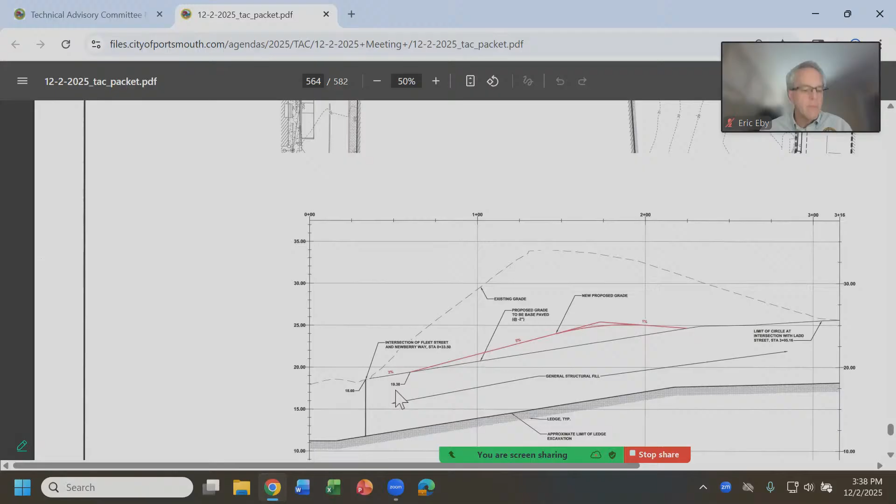Just the macro, getting it down there, and then Mark's going to pave. So there will need to be some sort of agreement, I would imagine, with the legal department regarding the foundations for the parking garage, Shanti? Right, part of this is going to be the actual excavation next to the garage.

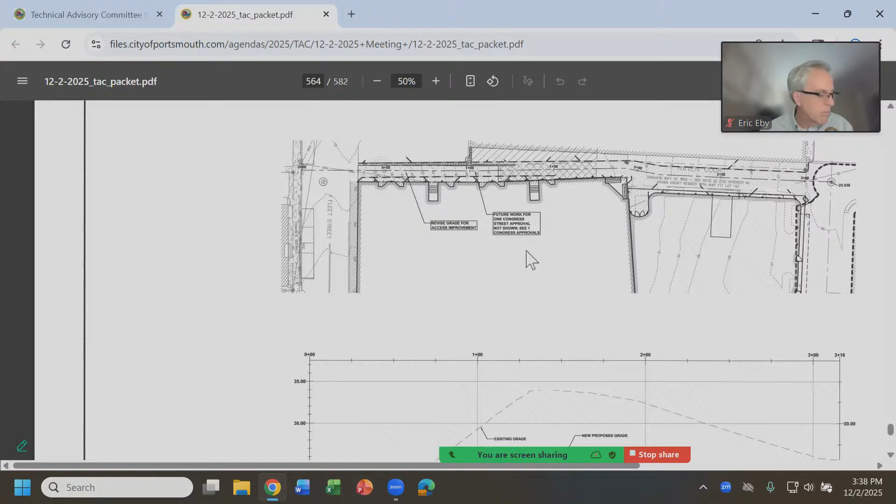What will we need legally if they're going to be encroaching on city property? You need a whole different... No, we're not encroaching necessarily, but undermining. Oh yeah. So you would just need a shoring plan, showing a condition that no undermining of any existing structure shall occur.

Shoring plan, right, stamped by a structural engineer showing that whatever method they're going to use will ensure there's no movement. Okay, so part of this approval is going to be the shoring plan? I mean, that's what you would need if it's approved by the city, right? And then there'll be an iterative process where we work through how to do that.

Right, but we don't know, at the very bottom, when we start knocking down Haven Court, we would then bring out what we find. Where we would then have a shoring plan, but we wouldn't do it to start, because we're solid ledge. We're just going to be removing a hill of ledge, and we'll be down maybe 2 or 3 feet lower until we get there and see exactly what we've got.

Because it's coming down 14 feet at the top, I would propose that the condition would be no undermining of the structures, and a shoring plan would be presented before any work proceeded that would undermine or affect the structures. How are you moving the ledge? We'll most likely have relief drilling from line drilling and blasting, we won't blast, and Severino will be doing the work, so it'll be a combination of mechanically removing it all.

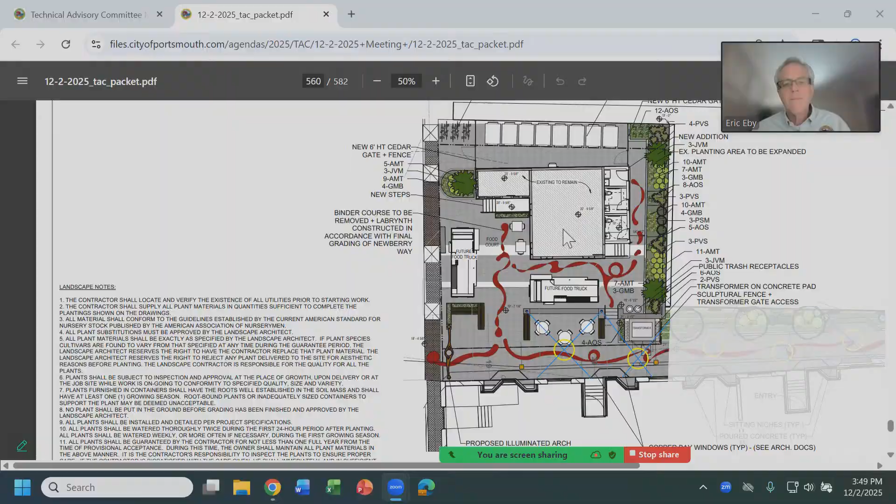Eric, do you have something? No, I was only questioning about the totes, the trash. They'll be brought out one at a time. It looked like they would get too big as shown to put them all out there at once. That's correct, they would never all be needed at once. This is really similar to 60 Penhallow that we do - we have twice as many, and then we move out 2 or 3 as we need for pickup. We move them with electric hand carts. I think the hotel does the same thing across the street, but it's worked really well at 60 Penhallow for 2 years. That's how we do it there.

All right, further discussion or motion? I'll make a motion to move this on with the conditions we already talked about. Second that. Did you second? Yes, okay. You heard it. All right, any further discussion? All in favor? Aye. Thank you.

All right, last item, the request of John Galt LLC, owner for property located at 14 Market Square, requesting a conditional use permit from section 10.1112.14 to allow 0 parking spaces where 4 are required. Property is on assessment map 107, lot 29, and lies within the Character District 5 and Historic District.

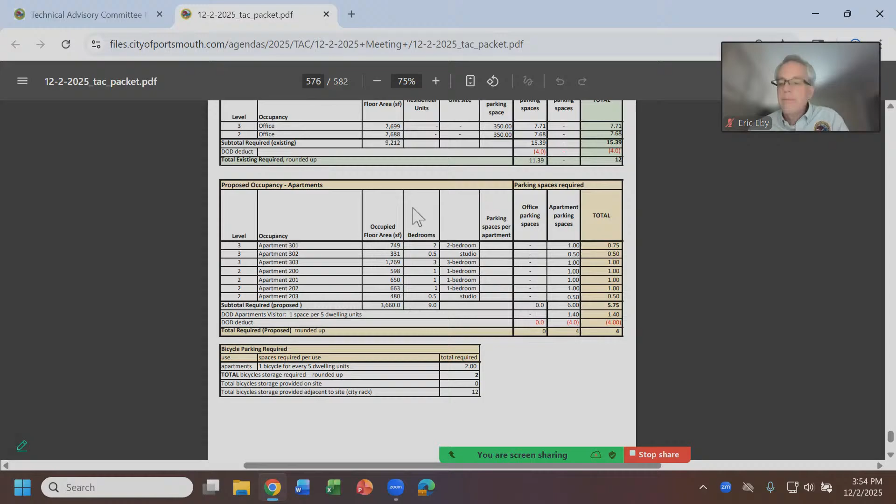Well, that would be the only place we can do it, in our common basement off of Daniel Street. I also own all the property around there, in terms of Brick Market, and my bike rack's there, and I could add them over there too if you wanted off-site. But here, the only place we could do that would be in the basement off our Daniel Street entrance. Is there room in the basement? There is, it's actually a full basement, it's a good basement.

The access to this is like the storefront access on Market Street, and then you just go up to the residential. So there is no Daniel Street, first floor residential space to put a bike rack or bikes. There's nothing outside to do it.

I can't miss the opportunity since everyone's technical here. It's part of the same 2015 changes in zoning downtown that carved out all kinds of things that so many buildings can't comply with. When more than 50% of the buildings are built on the lot line, and you mandate parking stalls for bikes, it's a built-in hardship. It's the same with parking. We come here and grovel for parking spaces, and 60% of the buildings are built on the lot line and 90% don't comply with parking. But I think the city just likes to spend the time on these boards to talk about it. So here we are. But downtown can't provide parking — it happened back then, it can't provide parking. Talk all day long about it, but...

I wish I had a magical pill to say, hey, keep all my office space downtown and not convert it to residential. But these old buildings just never had a demand on the upper floors. They've essentially been vacant for years and years on office space. It's very similar to 111 State Street that we converted to 7 apartments upstairs, same thing I did with Rosa. They were just empty, nobody wants to rent them for office. So really the only use for these 2 upper floors in this building is a residential use.